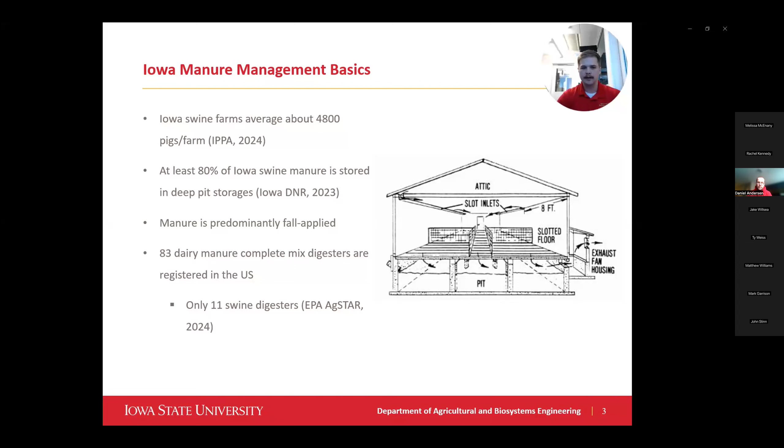In terms of digesters, in the U.S., there are 83 complete mixed dairy digesters, and there's only 11 swine digesters. And in a little bit, I'll get into some of the background on why we see less adoption with some of the swine systems, and they're not picking up on the digester trend.

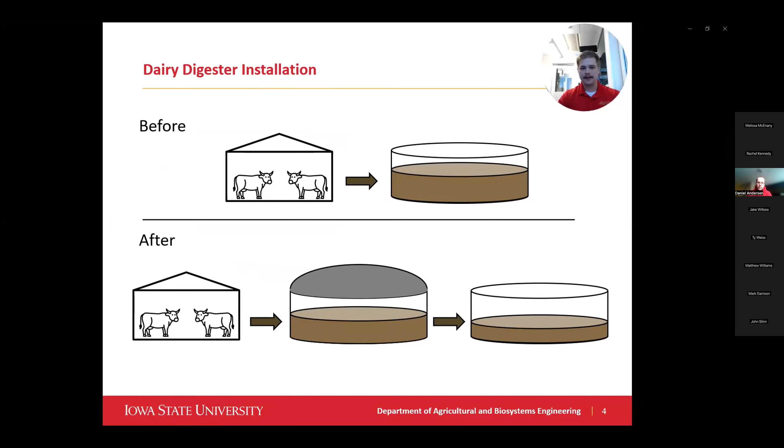So in a typical dairy system, when we're installing a digester, before you install the digester, you already have the barn and you have the manure storage. And so because of this, after you install the digester, all you really need to have is that digester itself in a very simplified form. Of course, a lot of you probably know that there are all kinds of other pieces of the system, but on a large scale, this is all that you install is the digester itself. Then you can store your digestate in what was previously your manure storage.

Now, in a typical swine scenario, you have the deep pit storage, which is below the barn. And so the barn and the storage are all built in together. And this kind of comes as a challenge when you're trying to install the digester, because you have a full year of storage already built into the barn, and you can't really get rid of that, and you can't really use it for anything after you install a digester.

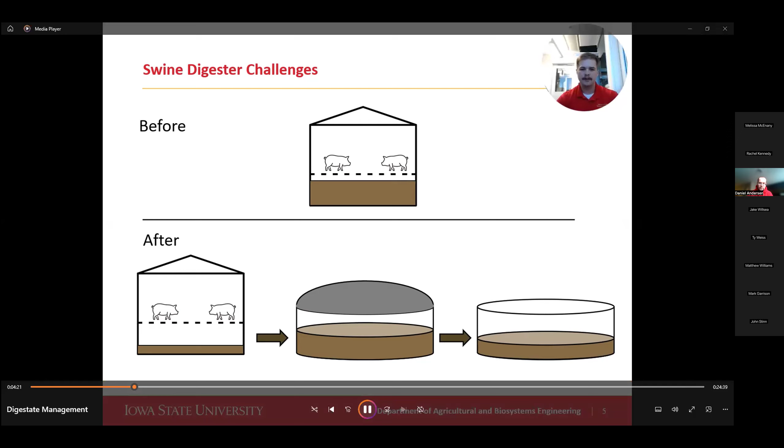So in the case where we would install a digester on a swine farm with a deep pit, you have to really treat that more like a shallow pit storage. And this can be a challenge as well. You have to store it up just a couple weeks and then pump it off into the digester. But now you have to have this secondary storage structure to store your digestate as well. So because of this, it can come as a pretty large expense to a lot of these swine farms, and that's part of the reason that we don't see a lot of these digesters here in Iowa with all of our pigs.

So this new storage structure comes at a pretty significant expense for a lot of these swine farms. Even at our smallest size, so about 1,200 head, you need about 500,000 gallons of storage for a full year of storage. Now, this will cost you about $150,000 just for a small farm like that. Now, they may not be installing a digester at this scale, but just for the sake of the analysis, we looked at a farm this size.

Now, on a typical 4,800 head farm here in Iowa, you need about 2 million gallons of storage. And this will cost you about $350,000, which, again, just for storage after the digester, this is pretty expensive, especially considering that you're already buying the digester and all of the equipment that goes with that.

Now, we do see some economies of scale. So as you get larger and larger sizes, your dollars per gallon is going to decrease. But really, a lot of our digesters are going to be definitely over 1 million gallons of storage for a full year of storage. And because of that, we're not going to see very significant changes as the size increases beyond the point that we're already at.

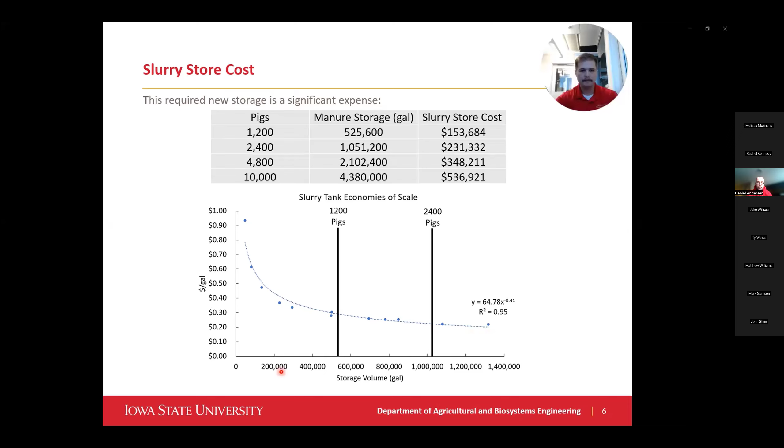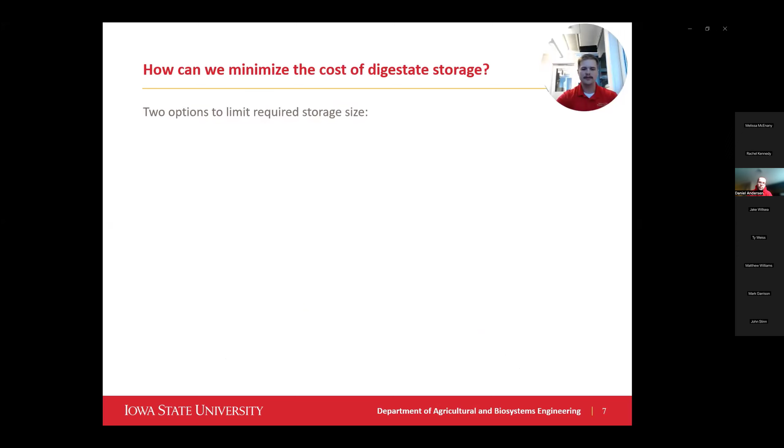Now, because of this new expense of the new storage, we want to look at different ways that we can minimize the cost of this digestate storage. And really, there are two options that we could consider. Now, the first option could be something like an effluent treatment and discharge, which would be similar to what we could see at like a municipal wastewater treatment process.

Now, this would have some filtration processes and then different biological processes that go along to clean out this manure or the digestate and separate the water from it, which can be discharged right back into a stream as clean water. Now, this is something that I won't be talking about today. This is something that may come up, hopefully, in this webinar in a following topic. But today, I'm going to be talking about how we can use more frequent applications to minimize the cost of the storage.

Now, some of the advantages of making more frequent applications is that you don't need to have quite as large of a storage. If you're going to be applying twice a year, you only need half the storage that you would have otherwise. Beyond that, we also see some effects of methane emissions mitigation. And so even after you digest this manure, there is still some carbon left in it. So we do see some methane emissions coming from digestate storages. One other benefit of this would be that the fertilizer value of this digestate can be improved if we're going to be applying this digestate more frequently.

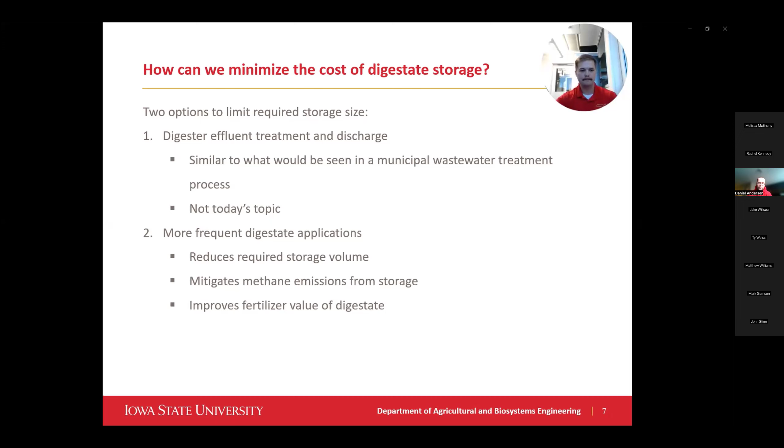So first, we're going to discuss how this reduces the required storage volume. So if we just look at applying twice a year, so every 6 months, we can see that the required storage size is cut in half, as you may expect. And because of the economies of scale, you don't quite see a 50% reduction in cost, but you still do see about 34% savings on this system, which if you're going down from $350,000 to $230,000, that can be a big deal on your farm.

We also looked at applying every 4 months and every 3 months, so making 4 total applications across the year. And this is really our upper limit of number of applications that we can do evenly spread out across the year, because we want to avoid applying on snow. And so if we can apply maybe early to mid-December, really the next time that you can do that is probably mid-March. So that's really our upper limit of how many applications we can make.

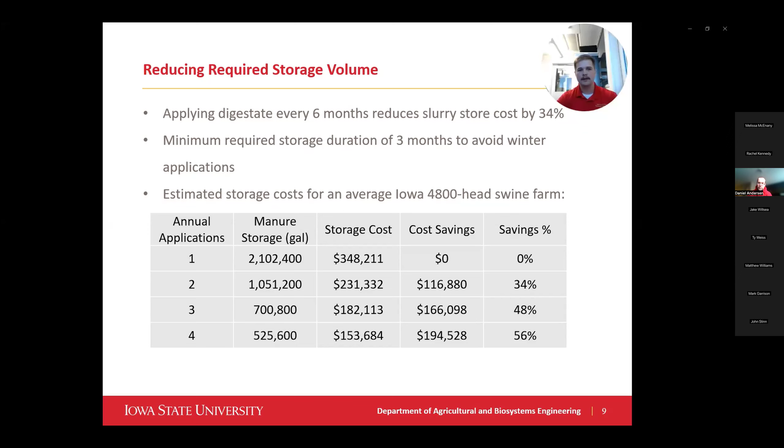And if we look at that, your storage size is about 500,000 gallons, and you have about 56% savings on that system. So this really, if we can cut it down to about 4 annual applications, that can have some significant effects on the affordability of this new storage volume. Now, I'll discuss a little bit how these more frequent applications can mitigate some of the methane emissions coming from your storage.

Methane emissions coming from storage is really a factor of, one, the storage duration, or in other words, the volume of manure or digestate being stored at any given time. If you're storing more digestate, you have more carbon available to be broken down, and you're going to be emitting more methane.

Similarly, the digestate temperature in your storage is definitely a big factor impacting your methane emissions. We look at it as a biological process, and as you see in a lot of biological processes, an increase in temperature increases the biological activity. So we usually say that for every increase of 20 Fahrenheit or about 10 Celsius in temperature, you're going to be doubling your methane production.

And so if you can apply your manure strategically at different times to avoid a large amount of manure or digestate being stored while the temperature is high, then if we can limit that, we can limit our methane production.

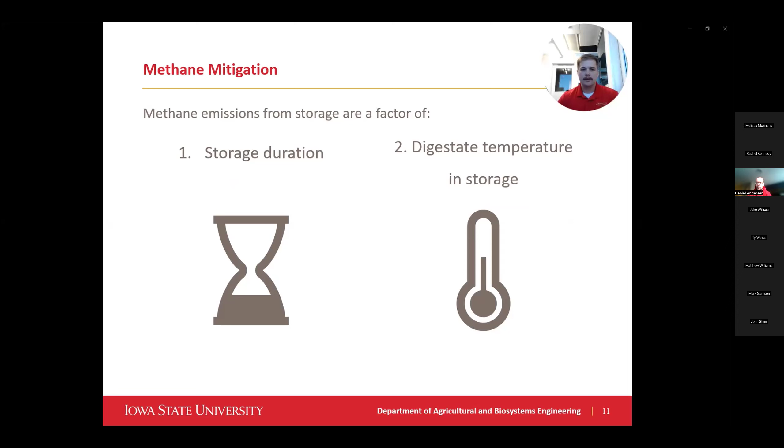So we looked to model this, and we looked at 3 or 4 different application scenarios. Our baseline scenario, which is our fall application, a spring application, which we said occurs on April 15th, a side dress application on June 1st, and then we also analyzed a scenario where we applied every 3 months, so 4 annual applications.

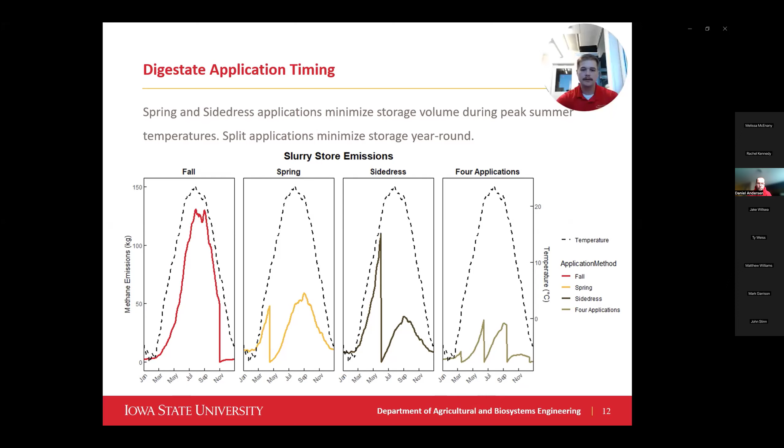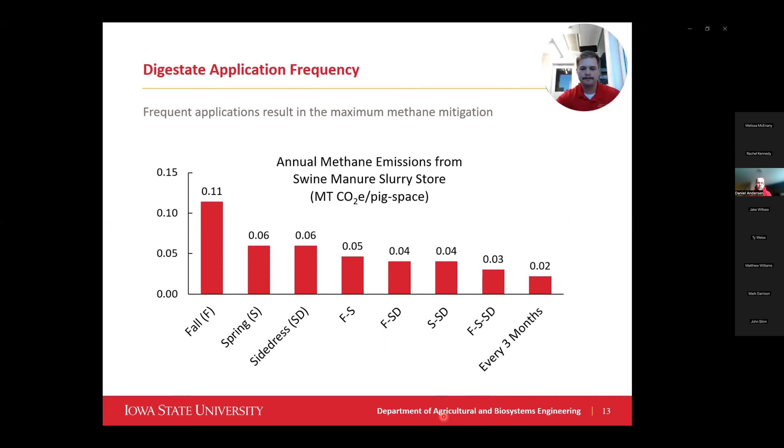Now, this CO2 equivalence reduction comes as an opportunity for a lot of these digester projects because we have opportunities for LCFS credits, the low carbon fuel standard credits. So when you're making a low carbon fuel like we do in a digester, any emissions abated comes as a credit to you. Now, we use the current LCFS price of about $60 per metric ton of CO2e abated. This is kind of a low value historically, but we wanted to keep it pretty recent and relevant.

And you might be thinking, an extra $26,000 would be great, but we're busy. We have these time constraints on our farm, so we can't be going out and applying this digestate all the time. Or we don't want to be spending extra money for custom manure application 4 times a year because a lot of these high application costs can be a limiting factor. So how can we find the time to do all this? Or how can we afford to do all this?

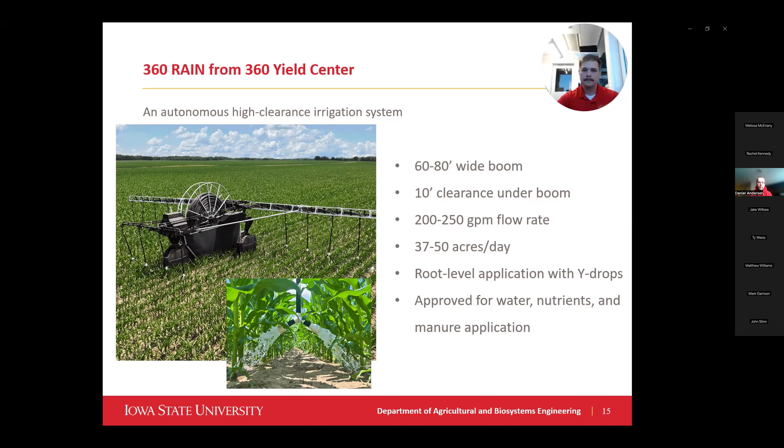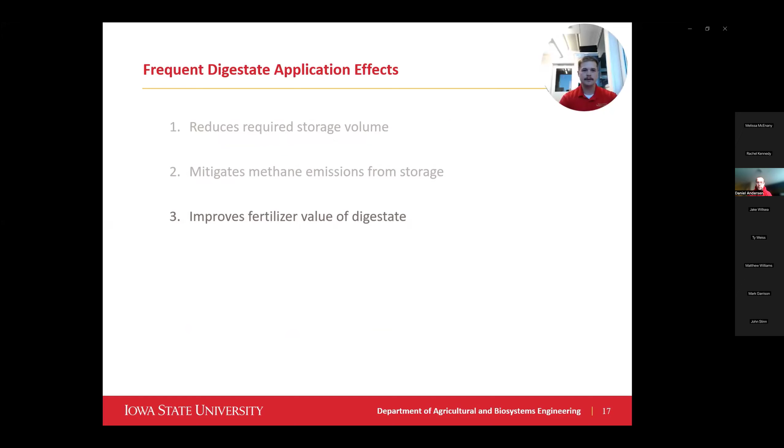Now, finally, I wanted to discuss the fertilizer value of this digestate as well, and how application frequency can have some beneficial effects on our fertilizer value. So when we're talking fertilizer, especially in the Corn Belt here in Iowa, we're talking about nitrogen. And really what we're concerned here with nitrogen application timing is the nitrogen loss pathways.

And we'll also see leaching. So when you have this ammonium in the soil, it can be nitrified, turning into nitrate, which is then very prone to loss through water drainage in the soil. Now, when we have a fall application, this nitrogen is sitting in the soil over the fall, the winter, the spring, and then it's finally taken up by the crop, hopefully in the summer.

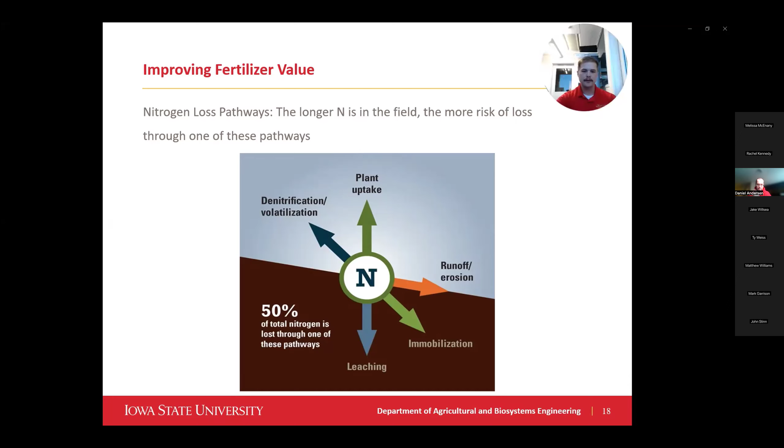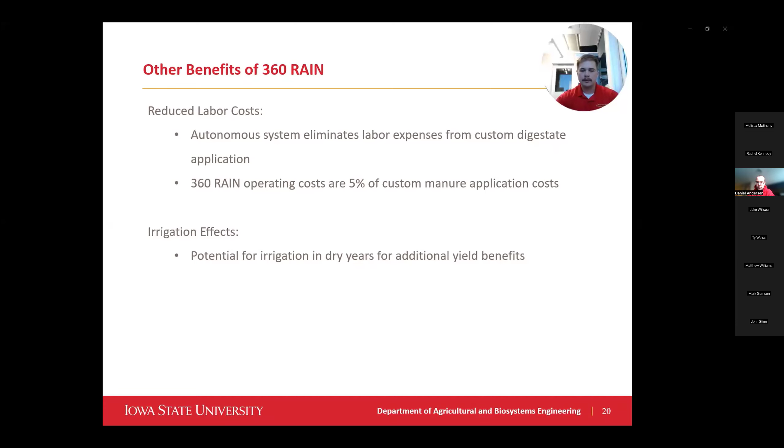Now, the main key takeaways that I want you guys to have here. First, digestate storage is a barrier to anaerobic digestion on a lot of our Iowa deep pit swine farms. And that's because now you need to have the storage, you have to have the digester, and it's not something that we see in a lot of dairy systems. So if we can apply our digestate more frequently, we're going to be reducing the amount of digestate that needs to be stored. And so we can cut down on the amount that we're spending on our digestate storage.

Additionally, by minimizing the amount of digestate that you're storing, we're minimizing our methane emissions as well. And in doing so, we're having opportunities for LCFS credits and additional income coming to your digester system. Finally, the 360 Rain from 360 Yield Center presents some opportunities for us for year-round autonomous digestate application. And I think beyond that autonomous application and being able to get rid of it, you have the additional benefits of this system of improved nitrogen application timing, reduced labor costs, and your crop irrigation. And like I mentioned before, your reduced methane emissions.